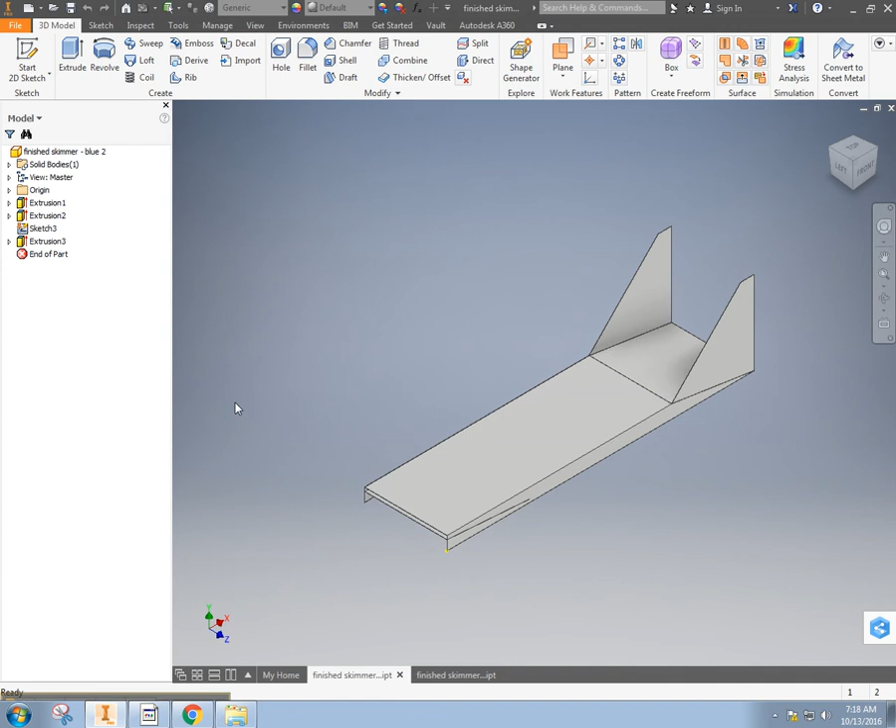Now with this open, I'm going to click on our new button again. There are lots of different kinds of drawings, but for right now the biggest thing we want is that it's metric, so I'll click on ANSI millimeter.idw, select that, and click create.

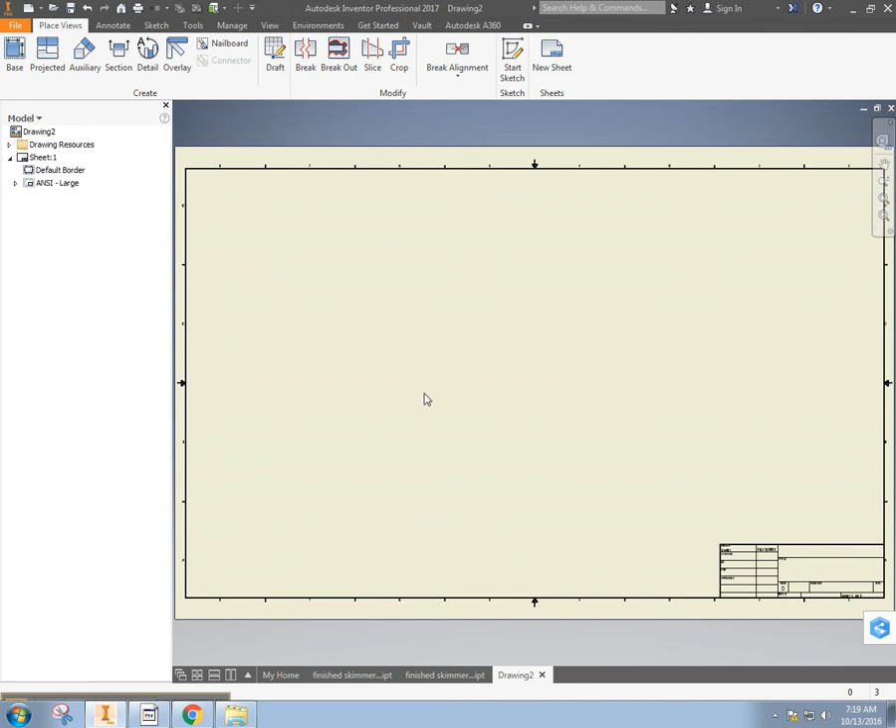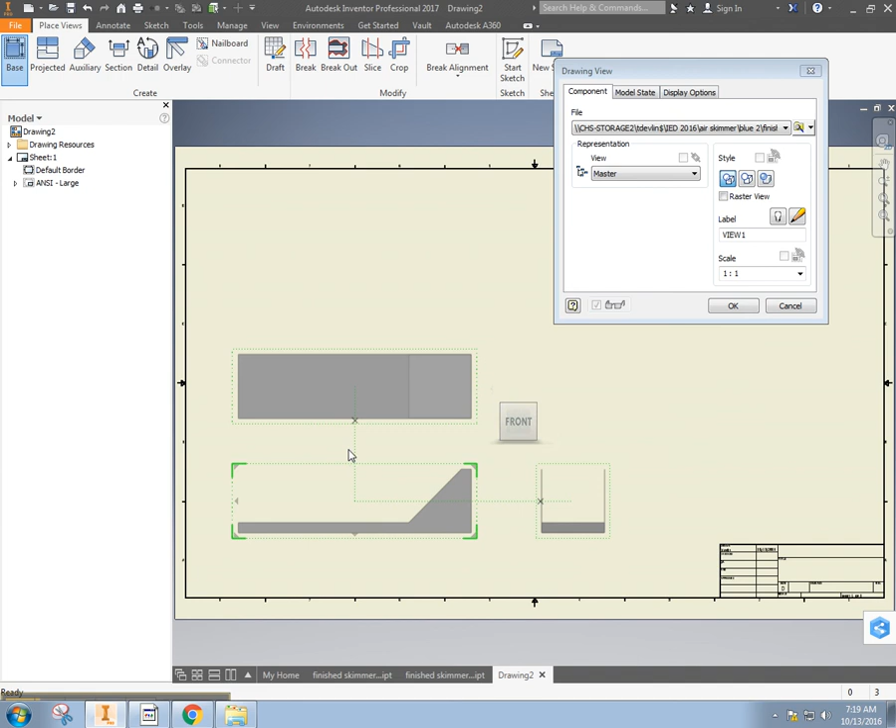Here's our drawing sheet, our fancy drawing sheet. The first thing I'm going to do is go up to base, and it selected my finished skimmer because the file is open. I can move this by clicking and dragging my box over, so there's our front view. As I move my mouse it gives me some options, so I'll click to place my top view and click to place my side view. Now with this all done, I'll click OK.

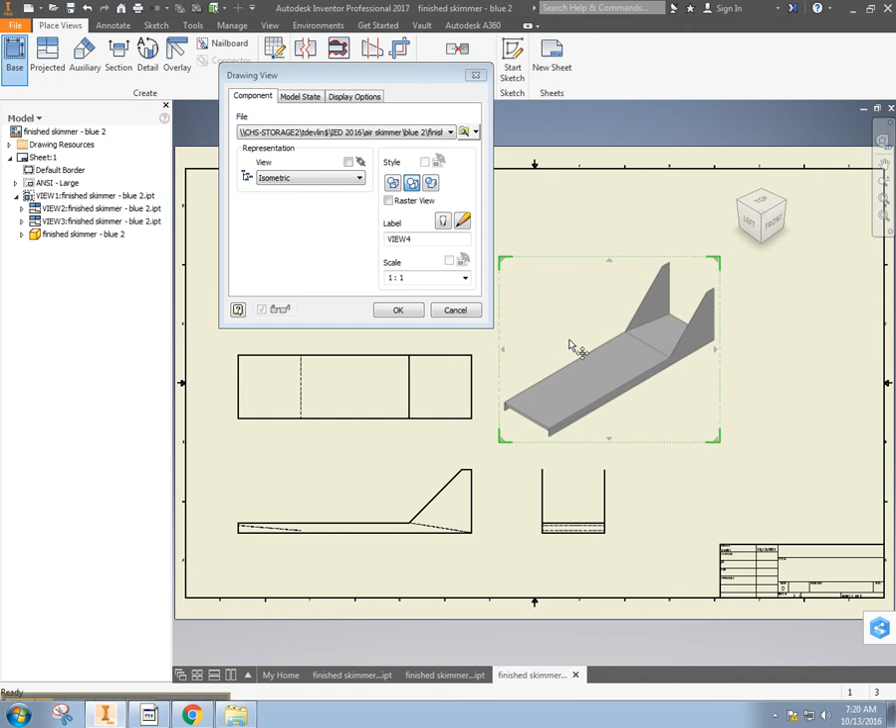I'm going to go back up to base to put my isometric in. I'll say that I want an isometric, and my view cube pops up, specific to this. I can click on my home, and if we have it set correctly, it should change to our home view that we have set in Inventor. Then I'm going to change the scale of this to 1/2 to make it a little smaller. I click OK, and now I have my isometric view in there with my top, front, and side views.

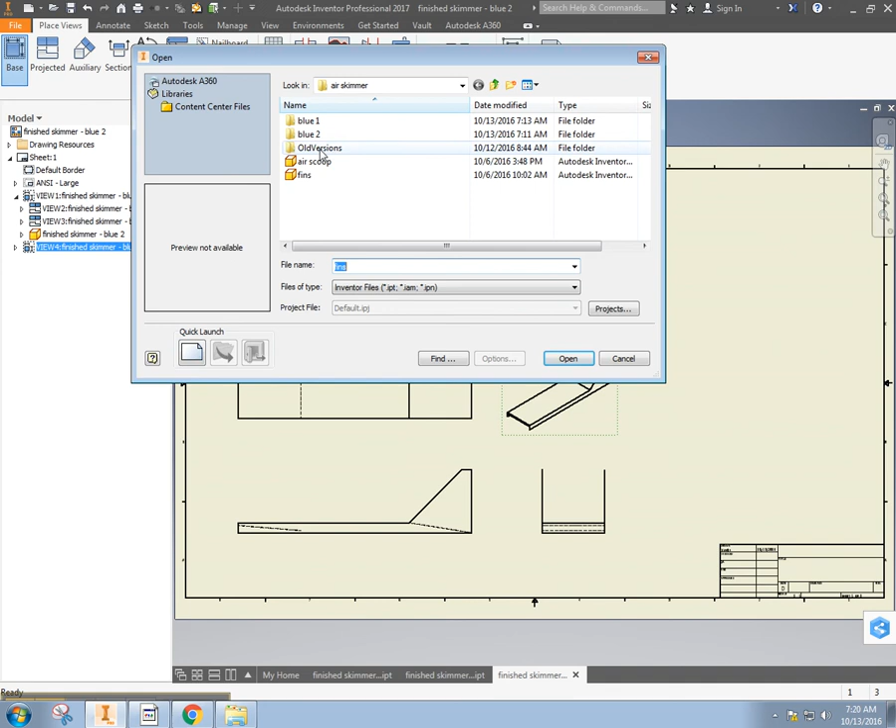Now I want to put my air scoop in and my fins. I'll go up to base again and click on my folder with the magnifying glass, choose my air scoop, click open, and it's putting it over here. I want it over here, so I'll move it over here. It's 3:1, so let's change the scale a little bit because that's pretty big. 2:1 looks pretty decent, so I'll click there, click there. So I've got my front view, my top view. I click OK, and that puts that in there.

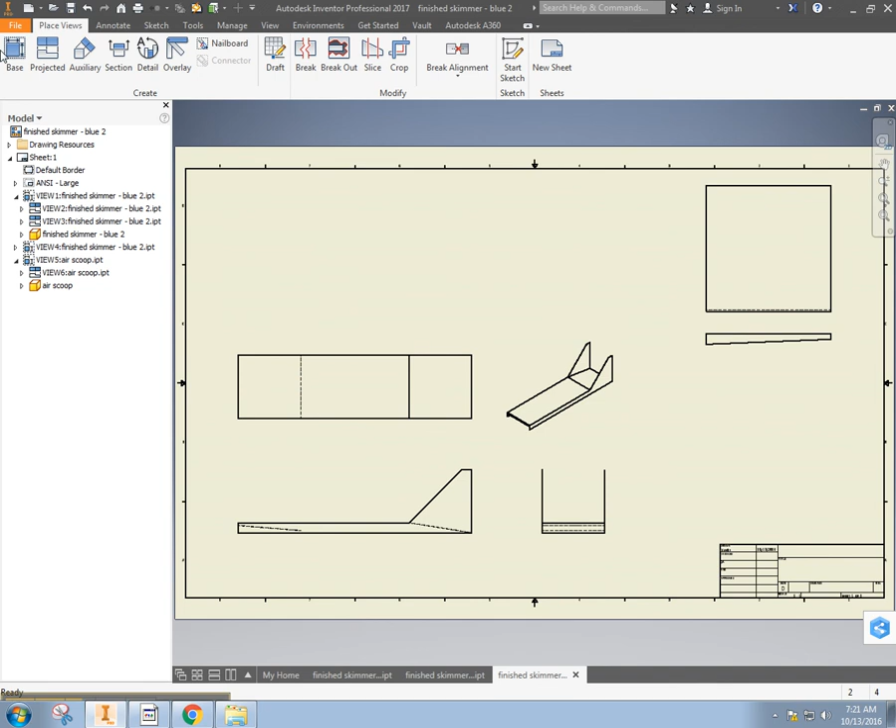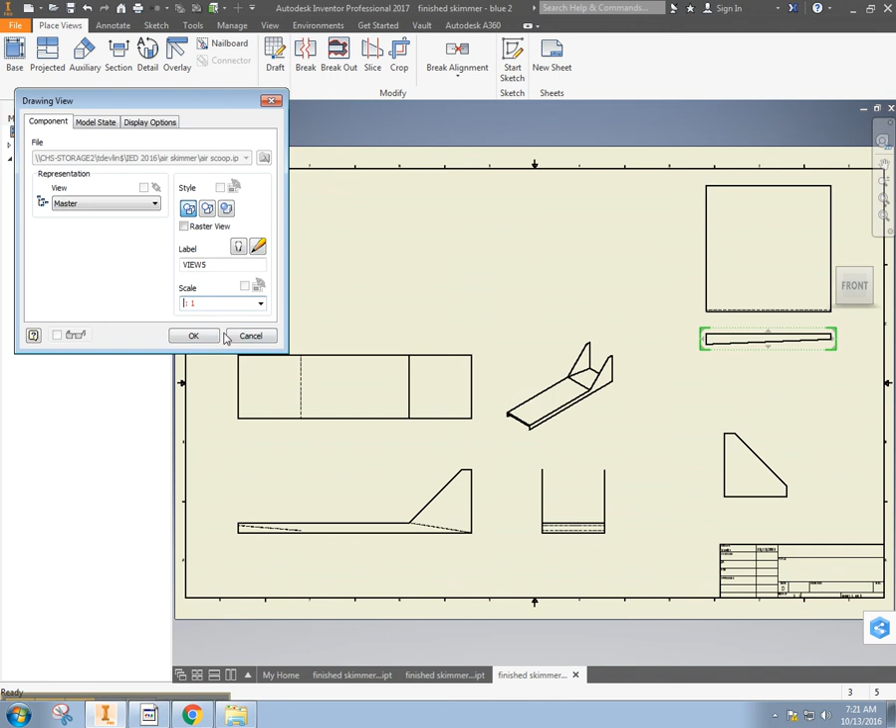I'm going to go back to base again and click on my folder, click on fins this time, click open, and I can go ahead and just place that in there and click OK. Now since these two are different, I'm going to double click on our front view and change this to 1:1, and it should change both of these views so they're the same. I don't want them different.

I kind of want to move these around to make them look a little better, so if you go over the view and get those red dashed lines, you can move these views. I'm just going to move these around until I like what they look like, and now I can dimension.

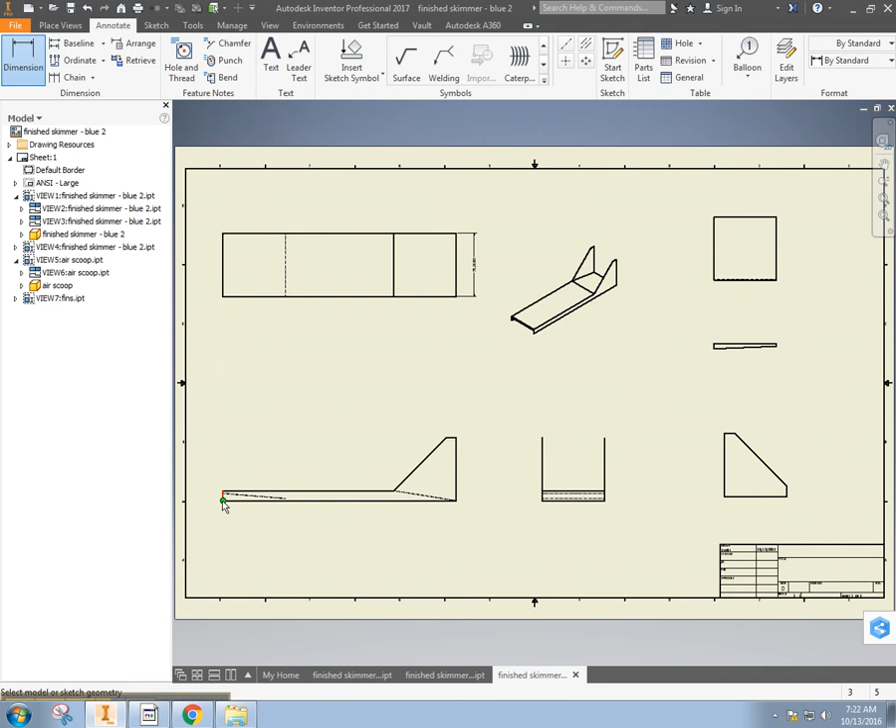I'm going to go up to annotate, dimension, and add all the dimensions that I think I would need to build this part. It works the same way as it did in the part file — you just click on a spot, click on another one you want to dimension that distance to, click OK. Let's put all the dimensions in here that we think someone would need to build this part, and no more — you don't want to put extra in.

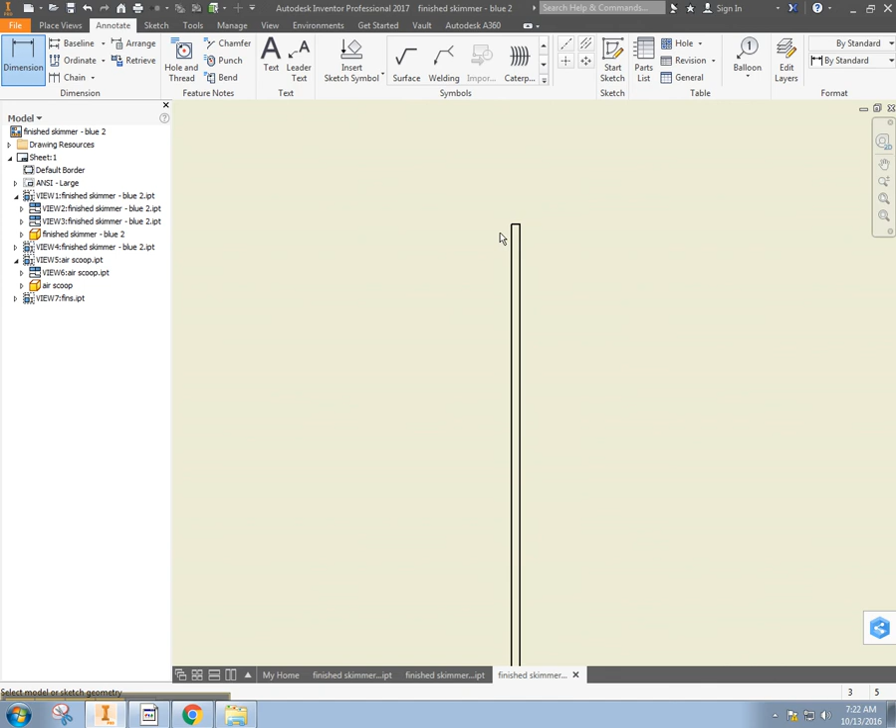So I'm going through, and I want to show that this is really thin, so I'll put that dimension on there. Then I can do my fins and show that that's 75. This box that pops up lets you change stuff — we'll go over that later, but for now you just click OK. I'm just going around putting in these dimensions. If something bad happens, just right click, go to OK, and select the tool again.

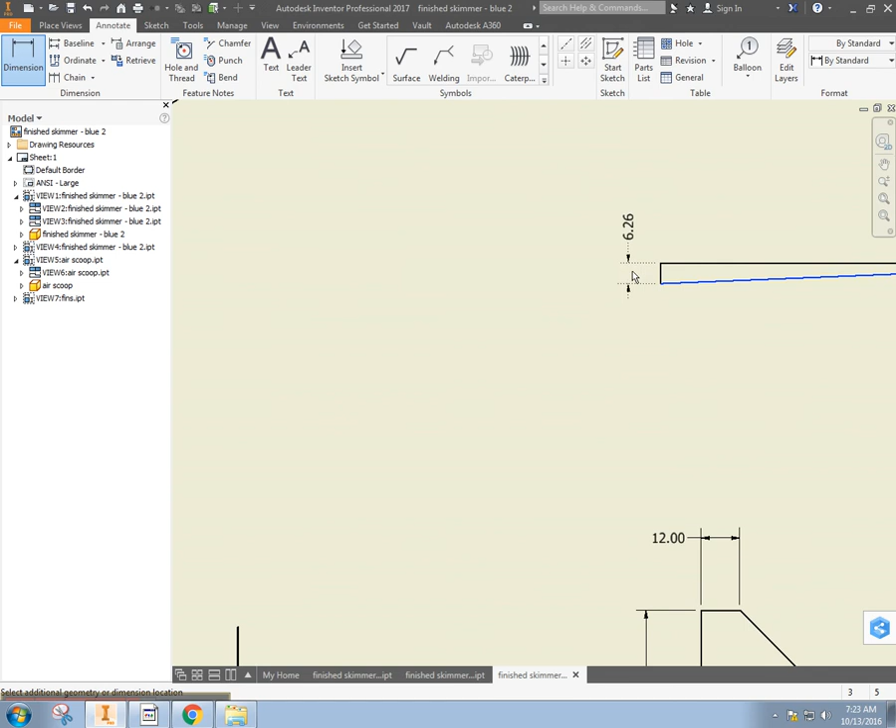I just noticed that that dimension's incorrect. I did have a part file with the wrong dimension, but that's okay — it still shows you how to do the drawing file. That should be 9.26. So now I've got all these dimensions in here.

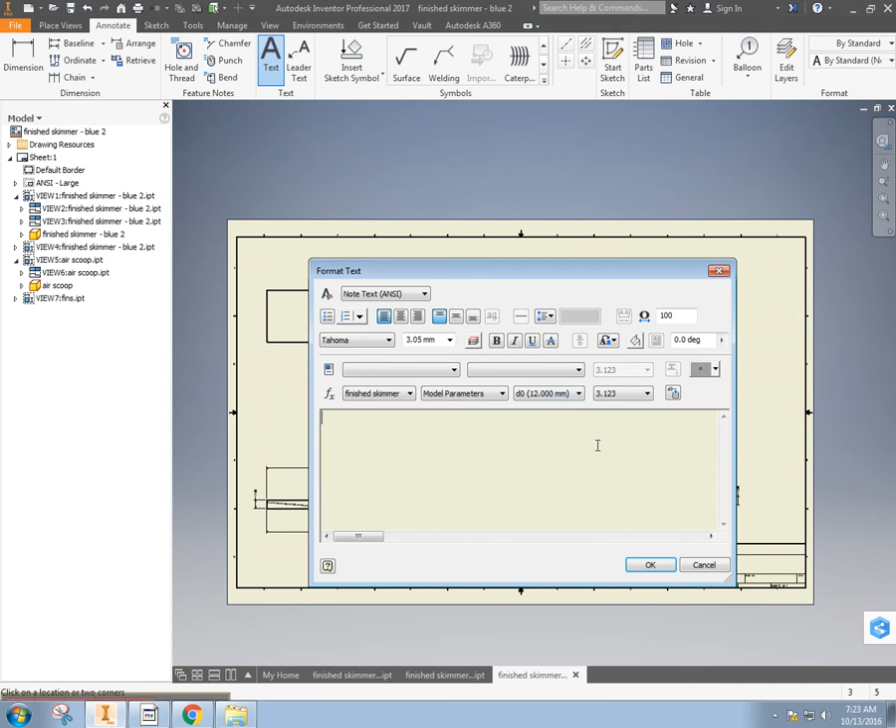If you want, you can add text, like you could put something here. Let's change the font and put...